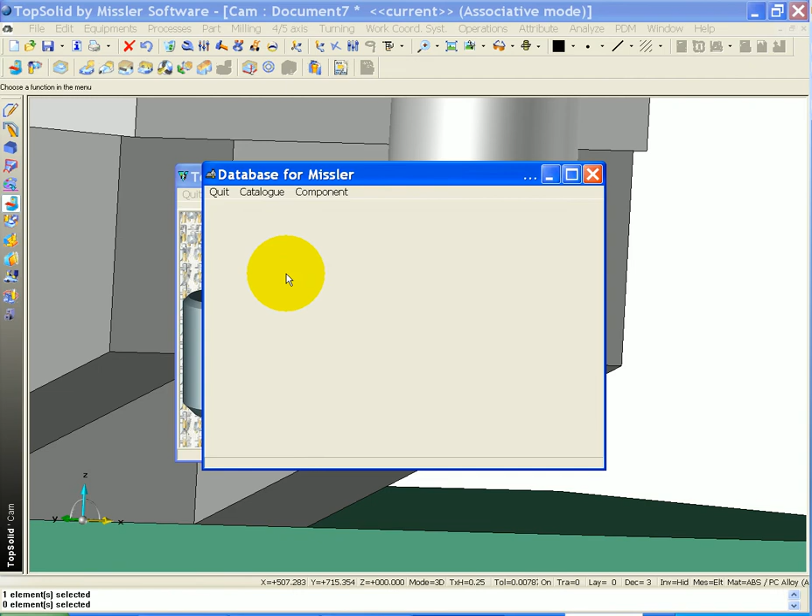Start by going to Description, Catalogs, Workshop Components. Here you're going to go to Database for Missler. Now go to Catalogs, Tools, and for example in this case we'll go do a ball mill.

So I'm going to go ahead and add a new one, but I'm going to start by saying it's a 4-flute standard length, and I'm just going to add a new one. I'm going to call this a 0.500 inch relieved ball end mill. Okay, so the tool diameter I'm going to say is 0.5.

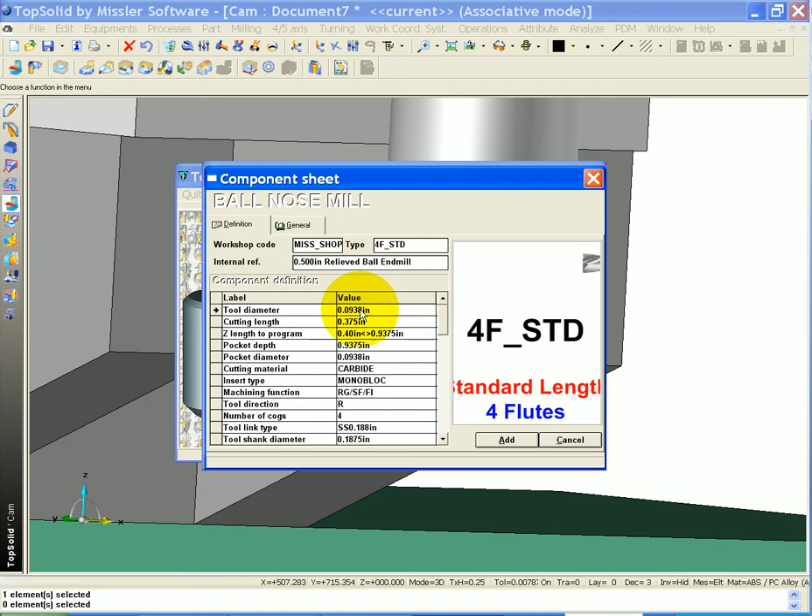The cutting length I'm going to say is 1 1/8. And now my Z-length to program, this is the default value that sticks out of your holder, and this is the maximum it can stick out of your holder. So here, actually I'm going to make this a little less. I'm actually going to make this 5/8.

So here I'm going to say that it's 750 all the way up to, I'll say 1 inch 750. Why not? Maximum pocket depth is 1 inch 750. Pocket diameter, so minimum pocket diameter, this is going to be 1/2 inch. It's carbide, it's monobloc. Tool direction's right hand, it's 4 teeth.

And then the tool link, this is how it relates to holders, that's this value back here. I'm going to say that this is going to be 3/8 because we're going to have a relieved neck on this thing anyway. Tool shank diameter, I'm going to say is 3/8.

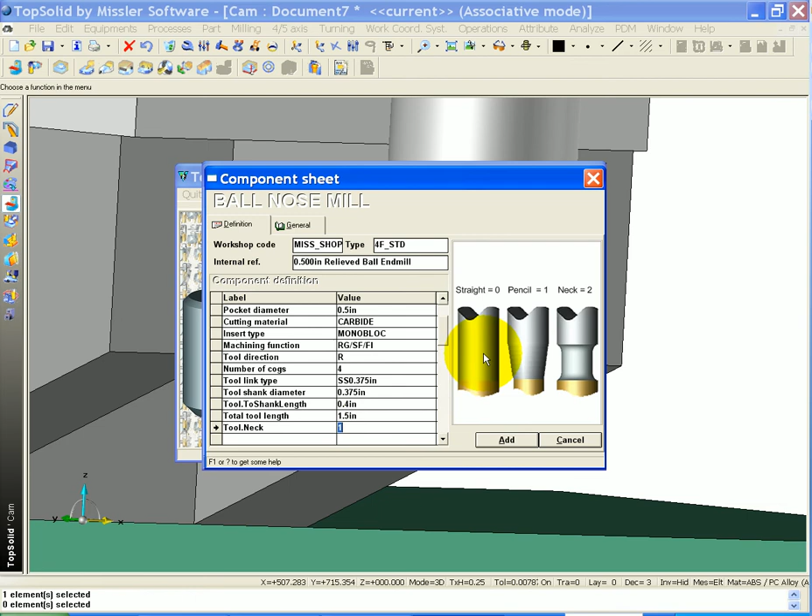I'm going to go down one more here, or a couple more actually, and go to tool neck. And here you have a straight neck, which is 0, a pencil neck, which is 1, and a neck like that, which is 2. I'm going to hit 2.

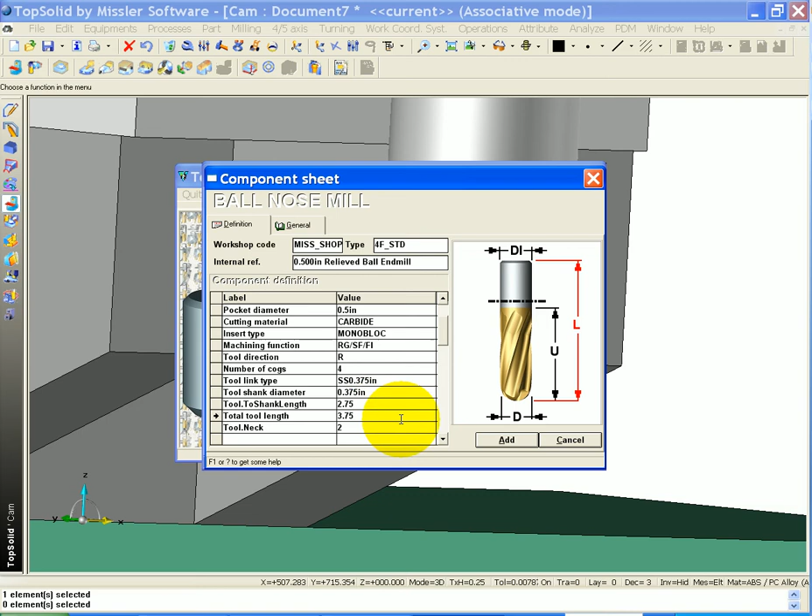And the tool shank length there, I'm going to say is, we'll say 2.5... 2.75, so it gives us an inch of relief there. And we'll say it's 3.75, why not? Okay, now we're going to hit Add. So we have our 1/2 inch relieved ball end mill.

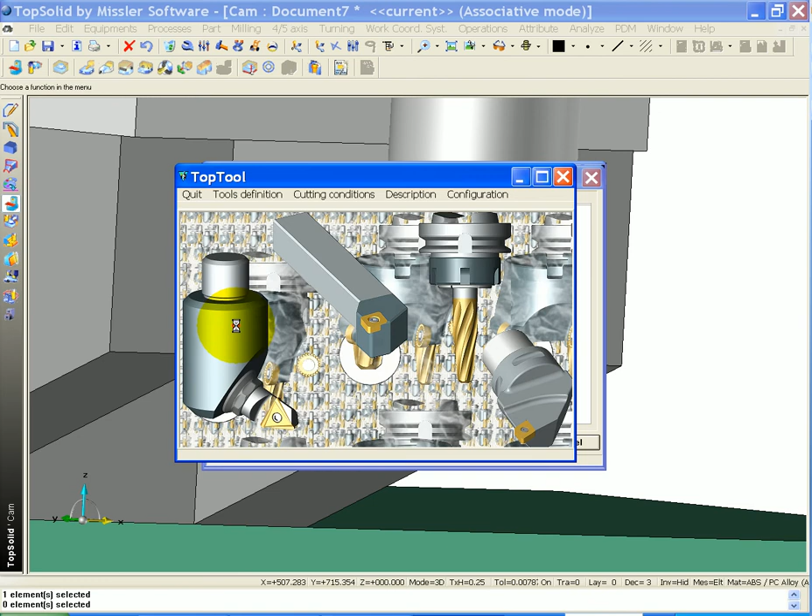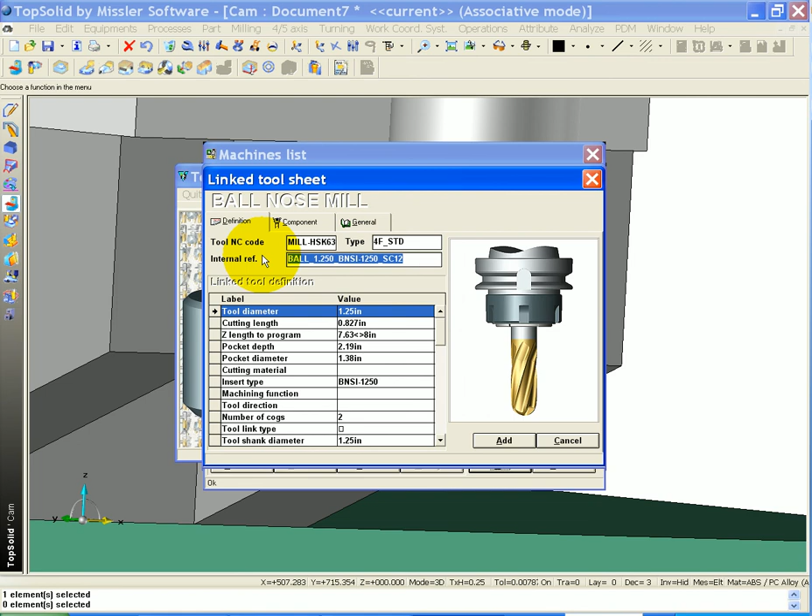And I'm just going to hit, let's go 4-flute standard, and I'm going to hit add. Oops, that didn't come up as 4-flute standard, so let's change that. I'm going to delete this. The important thing here is it says mill HSK 63, and for end mills and ball nose that you have the right number of flutes here, so you can use that filter.

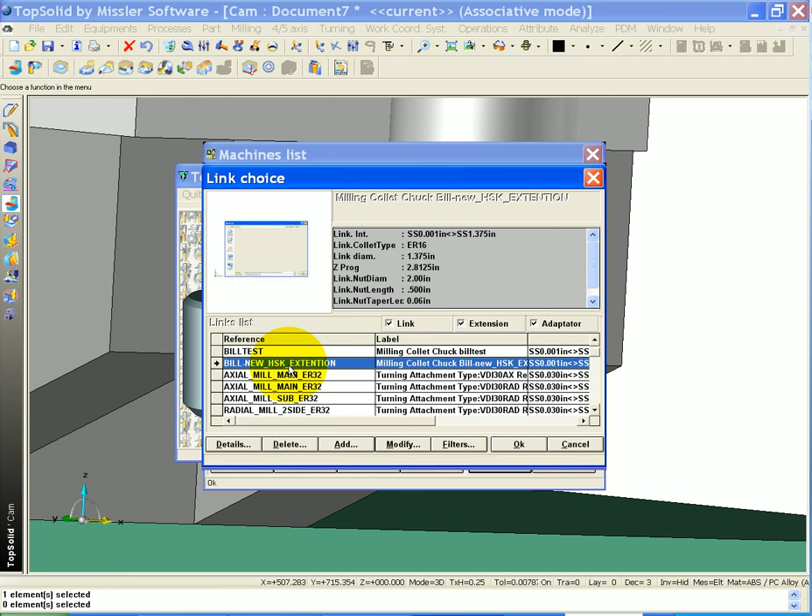Remove all that, and now I'm going to go find my 1/2 inch. So I'm going to go do a search for 0.5, and there's my 1/2 inch relieved ball end mill. I'm going to add again. And this holder here is a custom holder that I created and showed you how to create in another tutorial. So we're going to use that just for fun. And I'm going to say add, and we have our 1/2 inch relieved ball end mill.

I'm going to hit close, go into here, and let's go add this and see what it looks like. So let's scroll down to ball nose mill. Let's do a search for 1/2 inch. There it is.

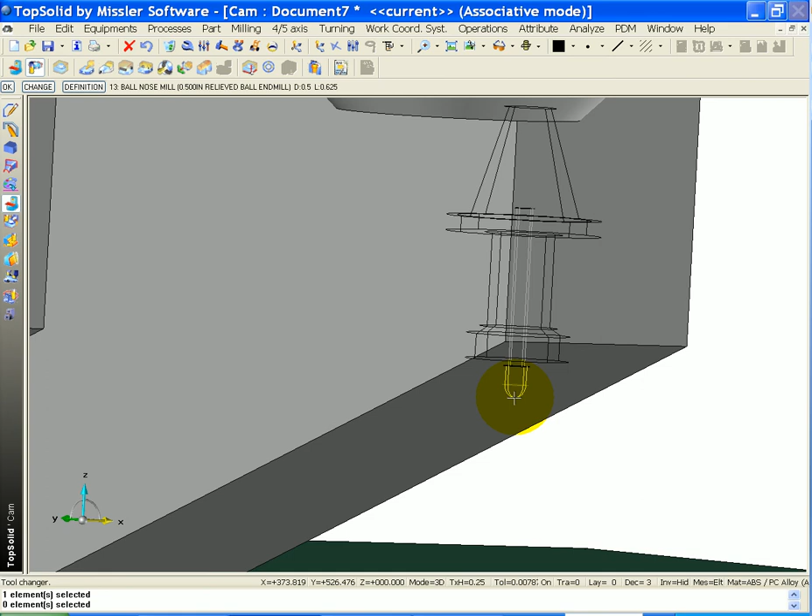And now you can see the relief there. If you want, you can go to definition, stick it out further. We're going to say 2.5. Say OK. And now, like that, you have a relieved cutter.